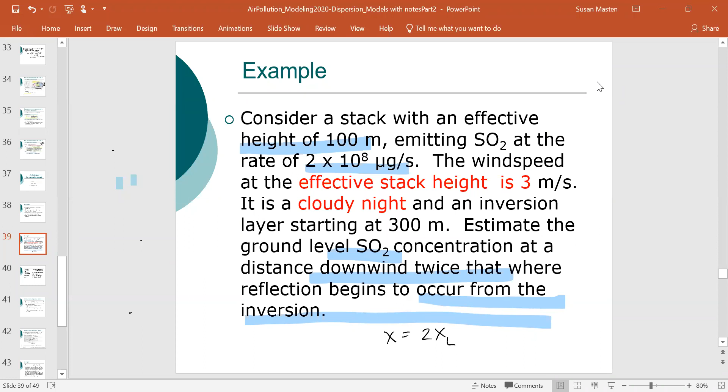So if there's no questions, let's move back to the problem that we were working on. We were looking at a situation where we're considering a stack of height 100 meters, emitting SO2 at a rate of 2 × 10⁸ micrograms per second. The wind speed at the effective stack height is 3 meters per second. It is a cloudy night, and an inversion layer starts at 300 meters. You're asked to estimate the ground level concentration at a distance downwind twice that where the reflection begins to occur from the inversion. I'll just go back to the image that we had here.

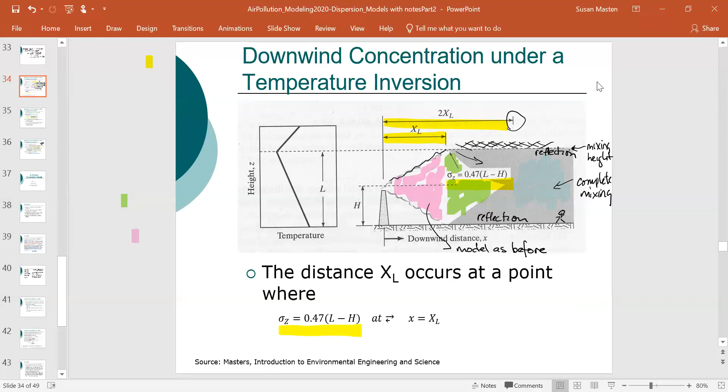So what we are looking at is determining the concentration at this point here, 2 times x sub L. So 2 times where the plume hits this inversion layer. And as we mentioned, in this blue region here, we can assume that we have complete mixing. We had started this problem here, wrote down some of the details, and I'm just going to note this here to make it a little clearer: this is 300 minus 100. I don't want it to look like L times H is multiplied by 300, but minus 100.

So we calculated then that we have sigma z equal to 94 meters at x sub L. So what we need to ask and determine now is what is x sub L? We have a cloudy night. I'm going to go back in the notes to slide 14. If we think through this, we said that U sub H is 3 meters per second. That means that U sub A, the wind speed at the anemometer, must be less than 3 meters per second. So that means that we are at stability class E.

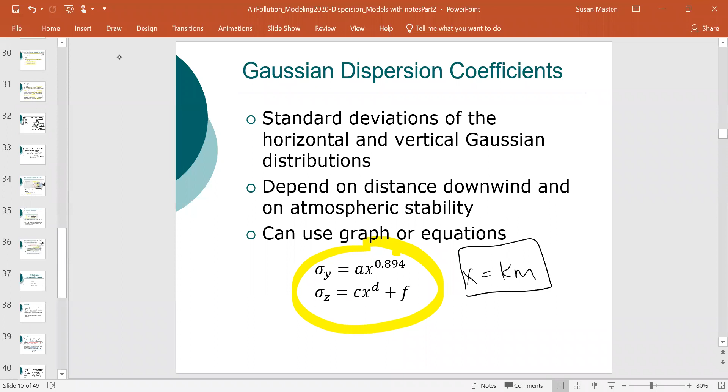Okay. So now we can move forward, and let's move back to our slide. We're going to do a little bit of moving back and forth with the slides, so forgive me for this. We're back here. So we have stability class E. What we want to determine is this value of x. That value of x corresponds to x sub L, since we've set sigma z as the value that occurs at x sub L.

So we can use the figure on slide 16 to approximate x, or x sub L. So let's go to slide 16 here. We have a value of sigma z of 95.

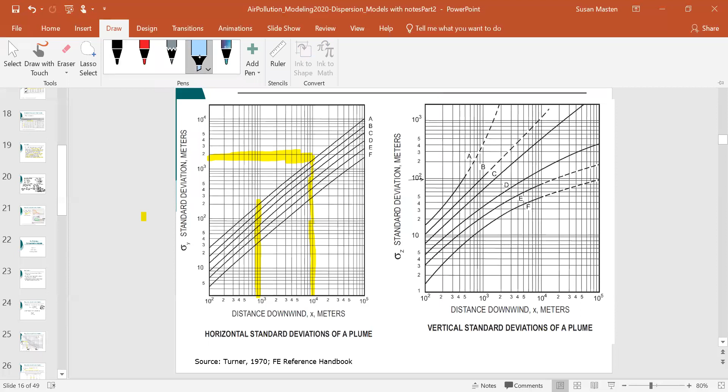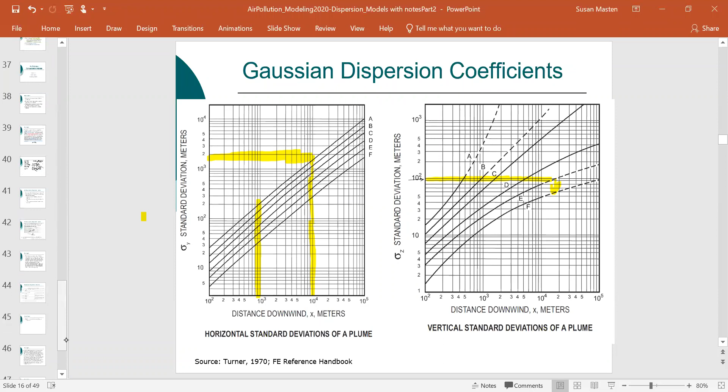We're going to read across, and I'll switch to the pen. So we're going to read across here. Okay, what do we have? We have class E, and we can read down. Okay, so that gives us, sorry, and would give us a value of around 16 kilometers. We can also use table 7.9.

So we can go back here. And what did we have? We had E 95. So you can see that's about 16 kilometers. So either way, what we end up with is a value of x sub L of 16 kilometers, or we can use the table for the values for C, D, and F. So that's 94 is equal to 55.4 x to the 0.305 minus 34. And if we solve this, x is equal to 15.6 kilometers. So we have a more accurate measurement, and that is equivalent to x sub L.

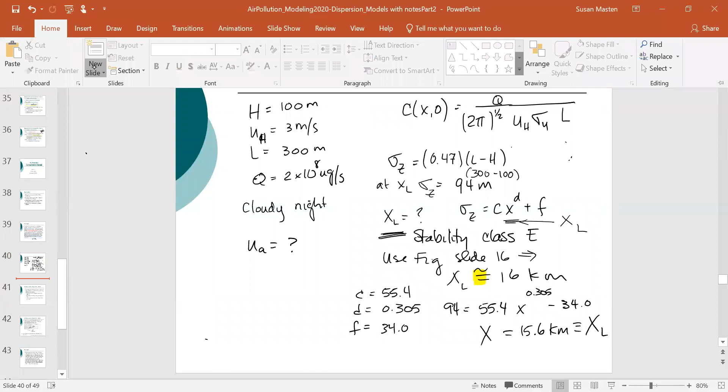I'm going to add a new blank slide in here just so we have a little more space. So what we want to do now is find sigma y. And what we're looking for, we were asked to find the concentration at 2 times x sub L. So that's equal to 2 times 15.6 kilometers, which is equal to 31.2 kilometers.

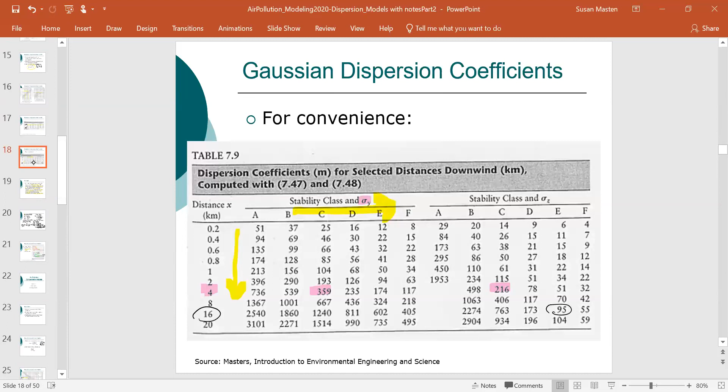So sigma y is equal to a x to the 0.894. So again, we're going to go back to the table of our parameters for solving this equation. And that is 50.5 times 31.2 kilometers to the 0.894. And that equals 1,092 meters. Okay, so these values here, let's go back and get them from table 7.8, slide 17. So let's just add that. So that's where you'll get those values here.

And now we can calculate C sub x, and that is equal to Q over (2 pi)^(1/2) u sub H sigma y L, and that is equal to 2 times 10 to the 8 micrograms per second over (2 pi)^(1/2), 3 meters per second, because we said that was the wind speed at the effective stack height, times 1,092 meters times 300 meters. L was the mixing height or the inversion layer, and that is equal to 81 micrograms per cubic meter. So that gives us the SO2 level.

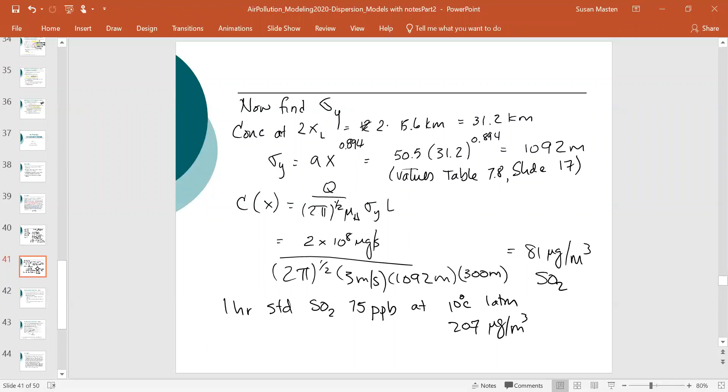And just to give you some comparison, the 1 hour standard for SO2 in the US is 75 parts per billion. And at 10 degrees C, 1 atmosphere, we'll assume it's a cold night, that would be 207 micrograms per cubic meter. So the value that we've calculated is significantly less than that 1 hour standard. So that would be a positive thing. Any questions about this problem here? Okay, if there's no questions, let's move on.

So the next and the last of the models, slide 40 again. Any questions about this approach? It's a lot of moving back and forth. You're doing a lot of parameter estimation. As you're working some of the problems, my advice is print out, in a form that's easily readable, the table of the constants for calculating dispersion coefficients, the graph for estimating your dispersion coefficients, and then slide 14 showing the stability classes for various different conditions. That'll make it a lot easier for working the homework problems, because you're going to need that information.

As I've mentioned, all of the LON-CAPA problems are coded. So all of the problems are using these types of constants. You can use the graphs, but this is how I've coded the problems.

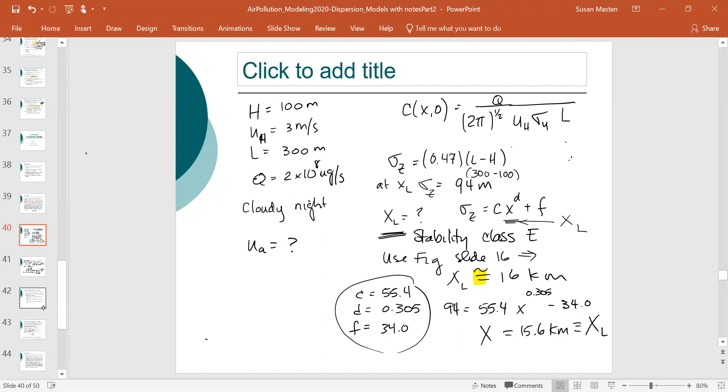So let's move to the last aspect of these dispersion models. Now we're looking at, for instance, a highway. So we have cars going along the highway. And I should have written it this way, unless you want to be in England. And we have a house. For instance, we've got some homes along this, and we've got some people.

And what we want to know is, you've got the steady stream of cars. So what we can do is estimate the cars not as a single point source, but as what is referred to as a line source. Or you could have agricultural burning of a field, and you want to measure the level of particulates along the edge of that field.

So again, instead of modeling the fire as a single source or an area source, you can actually model it as a line source. If you go back and think about the Meuse River Valley in Belgium, at the time they had numerous factories along that region. Instead of modeling each one of those sources individually, we could model it as a line source. So that's what we want to do. We want to look at how we would model this as a line source.

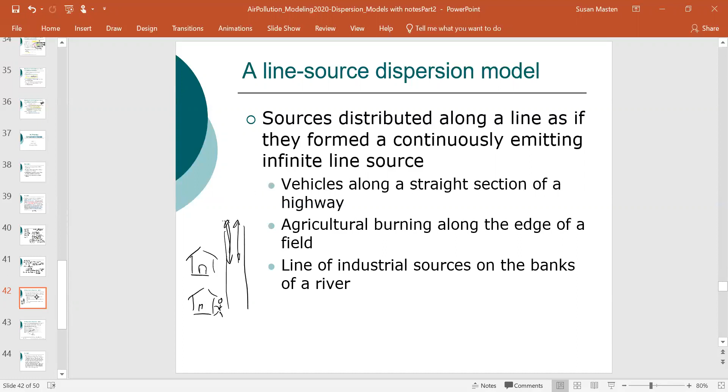So the equation that we use is right here. It's a slight modification of the dispersion equation. The big difference here is that your emission rate is per unit distance along the line. So notice before we used Q. This is not equal to Q. We have this additional term right here, per distance. So what we're looking at is modeling the rate along some distance, let's say of the highway, or some distance along a field, or some distance along this river.

The other thing is that when we're using this model, this is the distance we're looking at, and that corresponds to this length here. The wind is always perpendicular to that distance. There are other models that are more complicated, but this model always has the wind speed perpendicular to the distance you're looking at. So if we think back to our highway, we have cars along the highway, and we put the homes over here. The modeling that we're doing is always perpendicular to this distance along the highway. If the wind isn't in that direction, then the model is different, and you're not going to use this equation. But we're not going to model that in this course. That would be beyond the scope of what we will accomplish here.

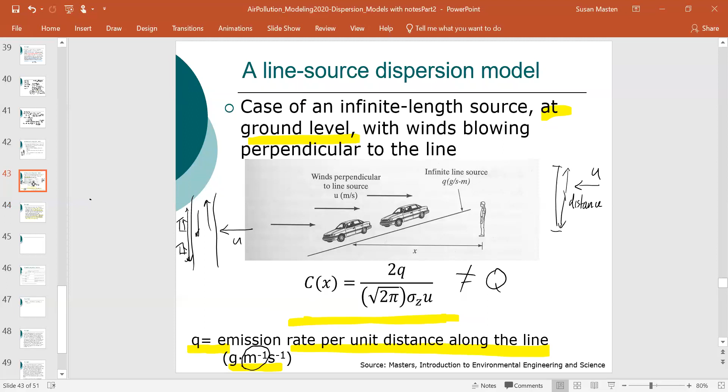So we have a situation here. This is the problem. The federal emission limit for carbon monoxide for new vehicles is 3.4 grams per mile. We're going to assume that we have 10 vehicles per second passing our houses, and each of them is emitting carbon monoxide at this 3.4 grams per mile. The wind speed is 5 miles per hour or 2.2 meters per second, and we have an overcast day. What you're asked to do is to measure the ground level carbon monoxide 100 meters from the highway. Let's also make sure we note the fact that this is at ground level. That's the other issue here. We're looking at a person at ground level.

So let's look at this problem here. What do we have? We have an emission of 3.4 grams per mile. We have 10 vehicles passing this particular spot per second. We have a wind speed of 2.2 meters per second. We have an overcast day. And you're asked to measure the ground level carbon monoxide level 100 meters from the highway, or 0.1 kilometers.

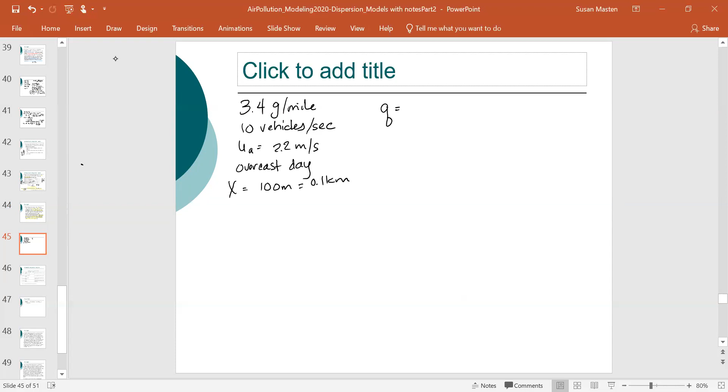Okay, so the first thing, we need to determine Q. We have 10 vehicles passing per second. We have 3.4 grams per vehicle mile. We have 1 mile per 1,609 meters. So it's just a conversion. Miles cancel and vehicles cancel. So what do we have? We've got grams per meter second, which is exactly what we want. And that is equal to 0.021 grams per meter second.

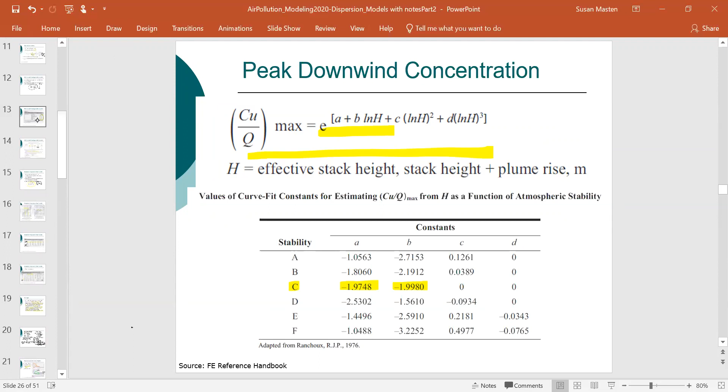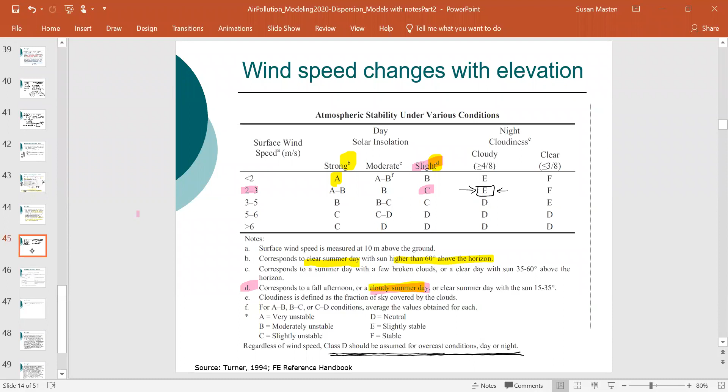So now we need sigma z. We have an overcast day. So what stability class is that? Anybody want to tell me? Oh, get the right slide. Okay, so we're going to go back again. That's why I said it's really useful to print this out. So what do we have? We have 2.2 meters per second. We have an overcast day. Oh, here we go. I knew that class D should be assumed for overcast conditions, day or night. I knew that was in there somewhere. I was trying to remember where it was. Okay, so you've got overcast conditions, so we're going to use stability class D.

So we have the equation for sigma z. We'll go to table 7.8 back in our notes. And this is equal to 33.2. Remember, put the value in x in kilometers, times 0.725 minus 1.7, and that equals 4.6 meters.

Now, one of the things I want to note here is this value is quite small. Remember, we're only 100 meters away. So if you remember, when we were talking about these dispersion coefficients, you're going to have a much tighter curve closer to the source. And then as you move away, you're going to get more and more,

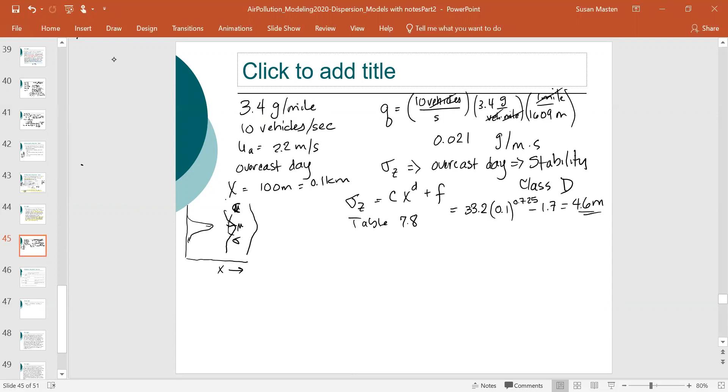sorry, so I'm going to draw this a little bit better. You're going to get more and more spreading out. So what happens here, remember, this is the mean, and this is sigma on that side. So notice, sigma smaller. So sigma is actually going to increase as you get more and more spreading, as you move further away from your source.

So C at 0.1 kilometers is equal to 2q over square root of 2 pi sigma z times mu. And you're really looking at ground level, so you can use that ground level wind speed, and that is equal to 2 times 0.02 grams per second per meter. We're going to multiply this to convert to milligrams, divide by the square root of 2 pi, sigma z, which we just calculated as 4.6 meters, times 2.2 meters per second. And that gives us a value of 1.7 milligrams per cubic meter. So that would be the concentration.

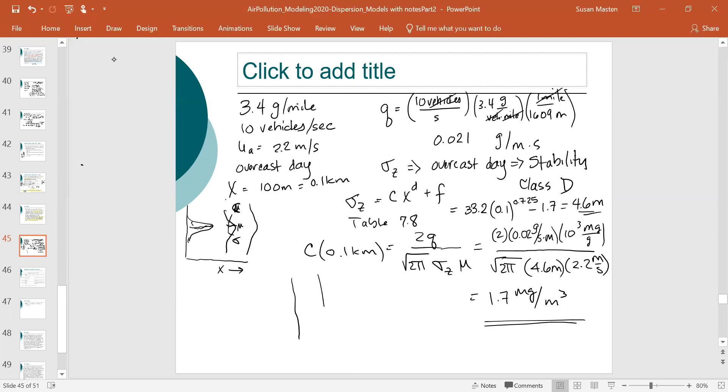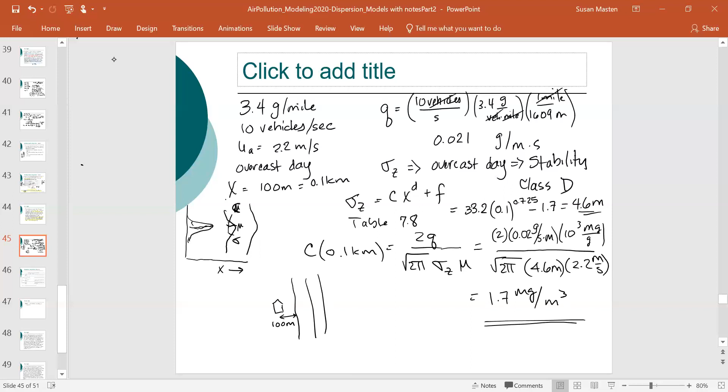So here's our highway, here's our house, and we're looking at 100 meters from the house. So this is the C value that we calculated would be right here. Any questions about this?

So what I thought I'd do is I've got a few example problems that we can work through. And normally I would have you work at these in groups. Since we don't have that, it's a little bit harder to do. We'll just kind of work through these. Okay, so let's look at this first problem. We've got 3 problems. We'll see how many we can get through.

So we have, in this case, a paper mill that is proposed for a location 1.1 kilometers upwind of a residential area. So we're looking at protecting that population in this residential area. The proposal limits the emissions of hydrogen sulfide to 80 grams per second. And hydrogen sulfide has an odor threshold of 0.1 milligrams per cubic meter. Surface winds vary typically between 2 and 5 meters per second at the anemometer at 10 meters elevation, and you're asked to determine the minimum stack height in order to ensure that the concentration near the edge of the residential area is no more than 10% of the odor threshold.

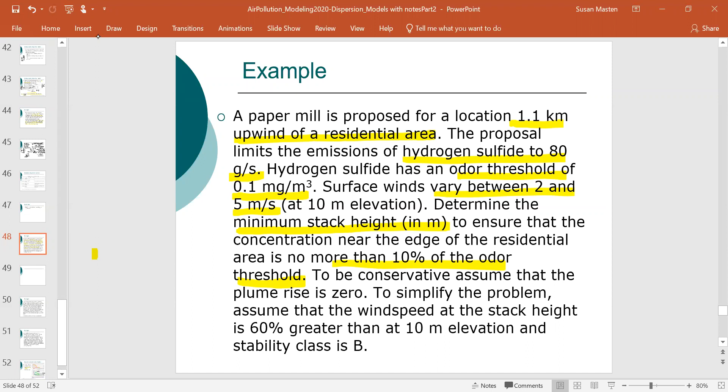We're going to make some assumptions to make this problem a little bit easier. Otherwise, we would have to use a much more complicated iterative approach. We'll assume that the plume rise is 0. And we will assume that the wind speed at the stack height is 60% greater than that at 10 meters elevation. So these are assumptions just to make the situation a little easier, and we'll assume that the stability class is B. So it gives us some constraints just to work through this in a reasonable time frame.

Okay, so what do we have? This paper mill is to be located 1.1 kilometers upwind of this residential area. Q max is 80 grams per second. The hydrogen sulfide threshold is 0.1 milligrams per meter cubed. We have wind, these are surface winds, that vary between 2 and 5 meters per second.

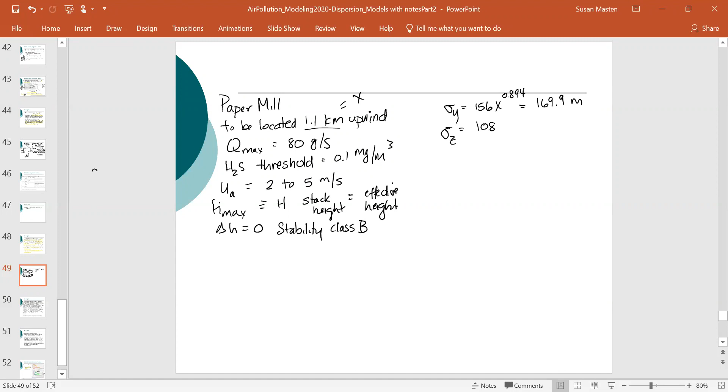We can calculate sigma y, and we'll get the constants from table 7.8. And x is given, so this is x. We can calculate sigma z. Sigma z is equal to 108 x to the 1.098, and that equals 122.1 meters.

And the equation we have is C max is equal to Q over pi u sigma y sigma z, times exponent of minus 1/2 h squared over sigma z squared. Okay, so if we just go back and look at this equation here, what we have is a pollutant level at ground level. We're looking at along the center line, and this is the equation we're using.

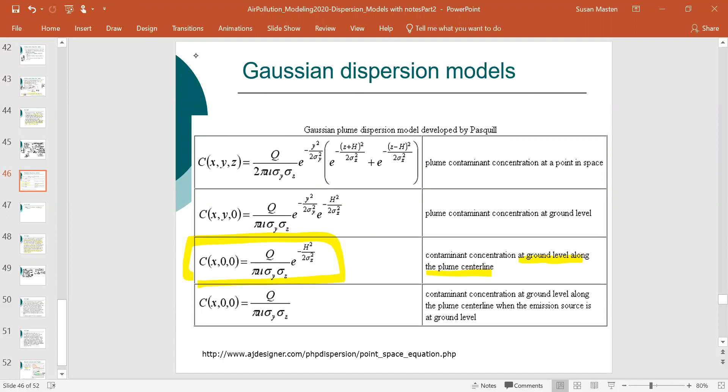And in this case, we've set C max as equal to 10% of the threshold, so it's 0.01 milligrams per meter cubed, or 1.0 times 10 to the minus 5 grams per meter cubed. And that is equal to Q, 80 grams per second, over pi. I'm going to just put U and U sub h here.

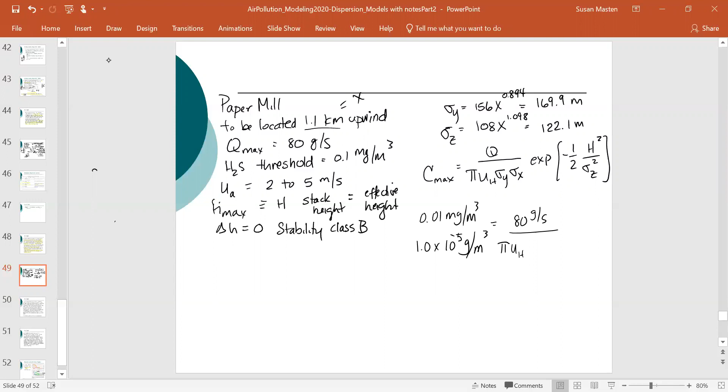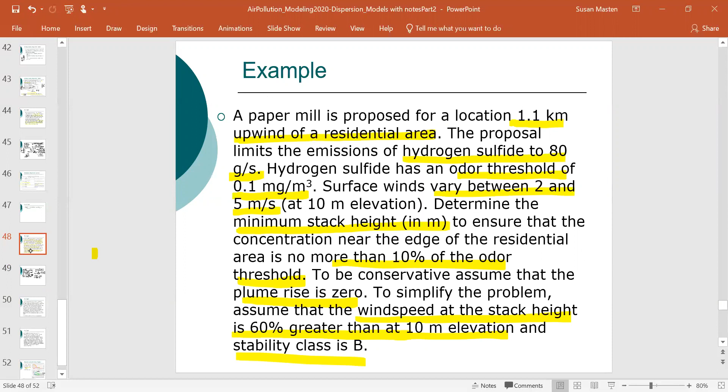And we said that U sub h, we go back here. What did we say? To simplify the problem, we're going to assume that the wind speed at the stack height is 60% greater than at 10 meters elevation. So let's put this here, times sigma y, which is 169.9 meters, times 122.1 meters, exponent minus 1/2 h squared, actually h squared is what we're looking for, divided by sigma z, which is 122.1 squared.

Okay, and the u sub h is equal to either 1.6 times 2 or 1.6 times 5 here. And I realized just now that I calculated this wrong. When I fix this in my notes, what I did was I multiplied by 0.6 instead of multiplied by 1.6 here.

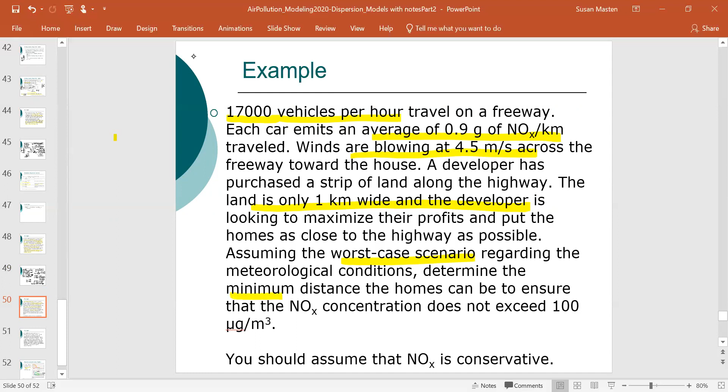So we're going to look at the worst case scenario regarding the meteorological conditions. And we're going to determine the minimum distance to ensure that NOx does not exceed 100 micrograms per cubic meter. Now, we're going to assume that NOx is conservative. We talked about how it's not, but in this short distance, it's relatively reasonable to assume that NOx is conservative.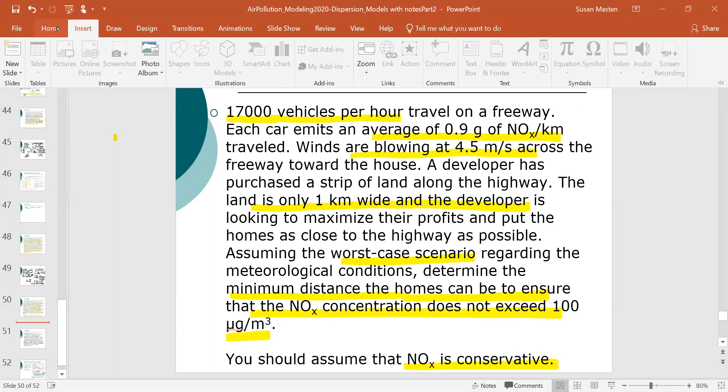So let's add a new slide. So what do we have? We have 17,000 vehicles per hour, each car emitting 0.9 grams of NOx per kilometer traveled. And we have a wind speed equal to 4.5 meters per second. We have land that's only 1 kilometer wide.

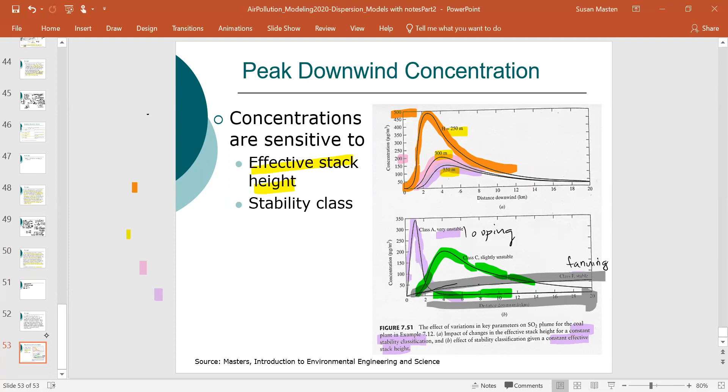Now the worst case scenario, we're going to assume is F, and that's because we go back and look at this figure right here. Notice that close to the ground surface, you've got this long period of time where your pollutant concentration is highest. So we'll assume it's F, although you might want to go back and check it for A because we're pretty close to the highway. So it may be that this very unstable condition is actually worse. But we're going to do the calculations for condition F.

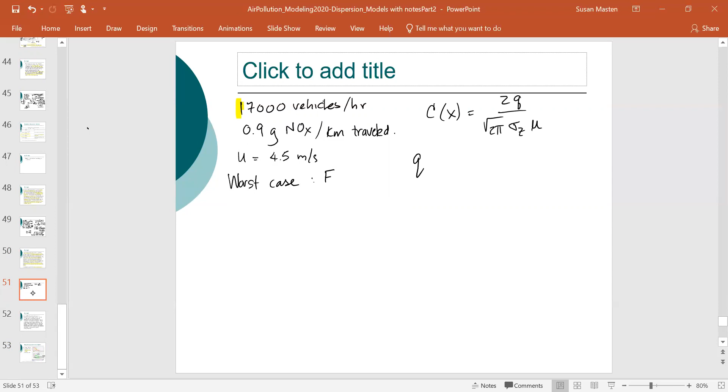And so we have C sub x is equal to 2Q over the square root of 2 pi sigma z times u. And I'm not going to go through the calculations, but if we take this information that's given, we've done the calculation before, and that gives us a Q value of 4.25 grams per second per kilometer. We've set C sub x as 100 micrograms per cubic meter.

And we're given u, so this 100 micrograms per cubic meter is equal to 2 times 4.25 grams per second per kilometer, times 10 to the 6 micrograms per gram, and we're just converting from micrograms to grams and from kilometers to meters, divided by the square root of 2 pi sigma z, which we don't have, times 4.5 meters per second, because we don't know the distance. Where did I get Q? Q is just as we solved it, sorry.

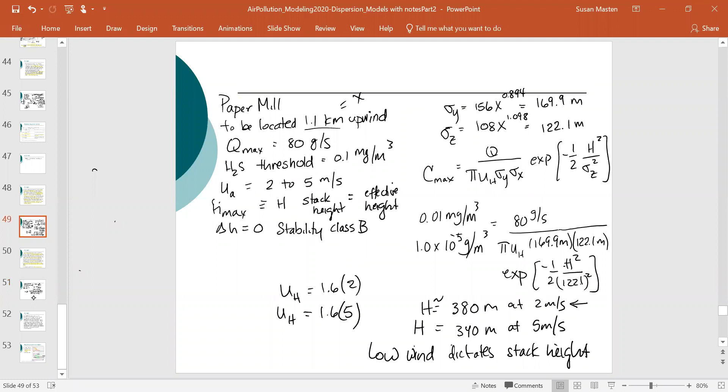Problem over here. So we took the vehicles per hour, or vehicles per second, times the emission rate, and we got Q. We'll do the same thing here. We'll take the number of vehicles per hour. We need to convert to seconds. And we have kilometers traveled. So I'll write that. We have 17,000 vehicles per hour.

We have 60 minutes per hour, 60 seconds per minute. So now we have vehicles per second, and we have 0.9 NOx per kilometer, and I'm just going to write this there. So, kilometers traveled, and then we have 1,000 meters per kilometer. So kilometers cancel, and this was per vehicle. So vehicles cancel, and that gives us 4.25 grams per second per, sorry, this should be per

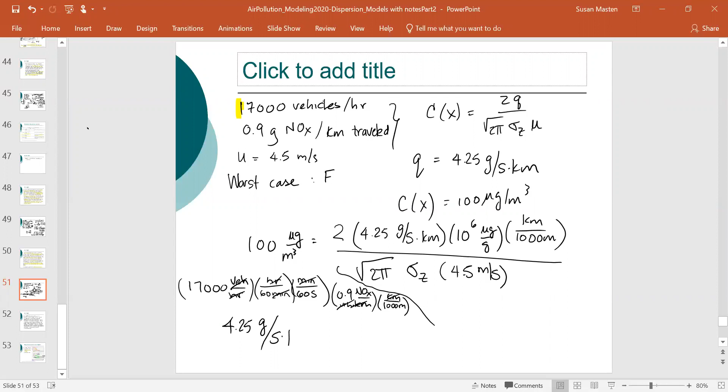I don't need to do that conversion per kilometer. Okay. I did the conversion here. Apologize there. Okay, so this is per kilometer. And if I solve for sigma z here, that is 10.44 meters. We said we use stability class F, so this is equal to CX^D plus F, or 14.35 x to the 0.740 minus 0.35. And so x is equal to 0.68 kilometers.

Okay, so this developer only has a kilometer wide strip along the highway, and under these conditions, each house has to be at least about 0.7 kilometers from the highway. So they're probably only going to be able to put about one row of houses along this strip. Does that make sense?

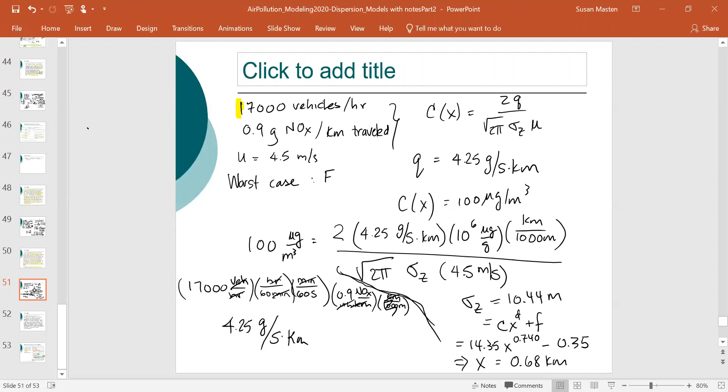Okay, we only have about 3 minutes, so we're not going to be able to get very far on this next problem. But I just want to walk you through this, and I will give you the answer. I'm not going to work through it. I'm going to suggest that you try this problem and see if you can get the answer. I'll scan it and put the answer online, but it's worth walking through this in the last couple of minutes to have you think through it.

So we have a coal-fired power plant with an effective stack height of 85 meters, and it is emitting 1 gram per second of SO2 per megawatt of power delivered. So that's power out. Okay, the wind speed at 10 meters is 3.3 meters per second. We have smooth terrain, and you're asked what is the maximum rating for the plant if the ground level SO2 cannot exceed 170 micrograms per cubic meter.

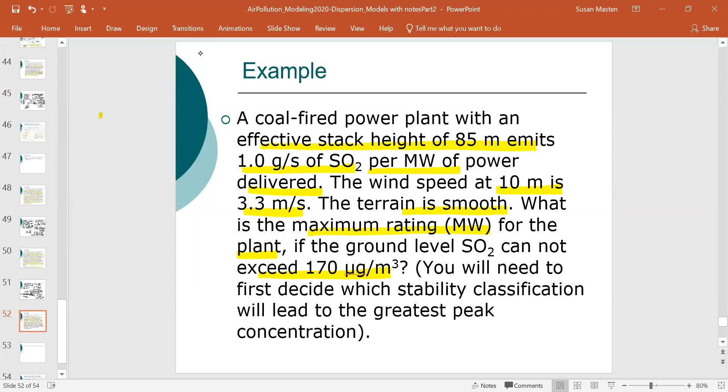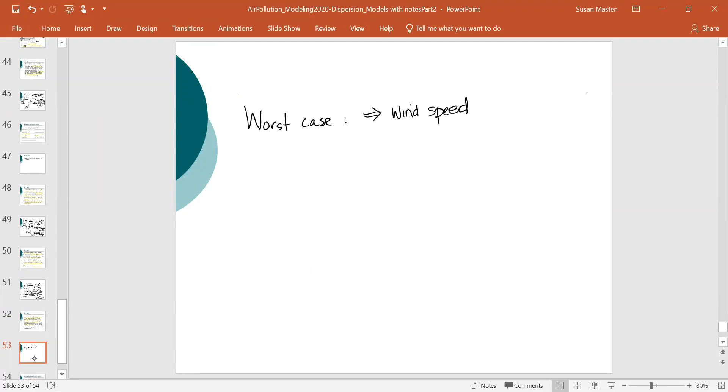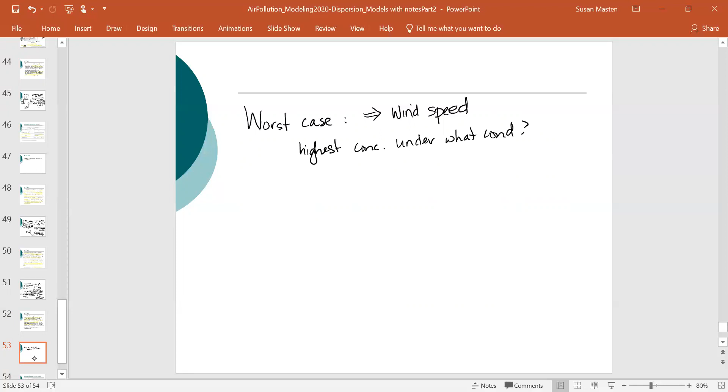Okay. The first thing, and I'm not going to do the calculations, but what I wanted you to do is work through the process of solving this problem. So the first thing you need to do is figure out what is the worst case. So you'll need to look at the wind speed, and think through what would be the worst case. Think about what the plumes would look like under various different conditions, and under what conditions you would see the highest concentration. Then you need to determine P.

Okay, so once you figure that, don't forget this is for smooth conditions. So you need to multiply by 0.6. You're going to need to determine the wind speed at the stack height. And then what you will need to do is determine this value for Cu over Q max. There's both an equation for this and a graph, and you can use either one.

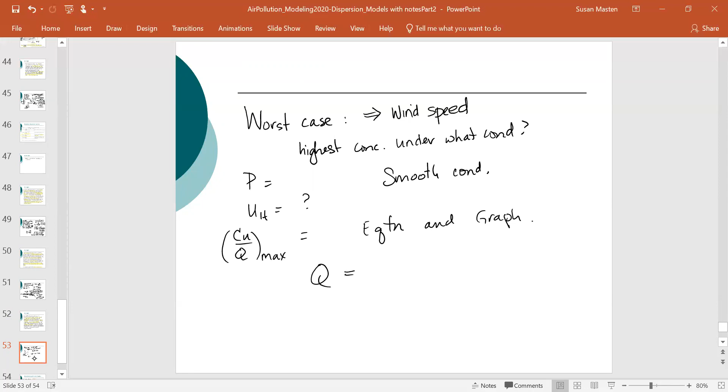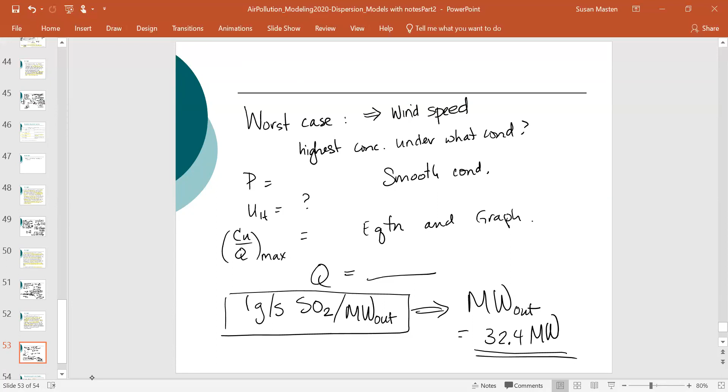And I'm going to suggest that on your own, you work through that. You might want to try and consider different stability classes. You could try stability class B, see what it is. Try stability class E and see what it is. See what you determine for the limit in terms of the output of this plant. So I'll end there unless anyone has any questions.